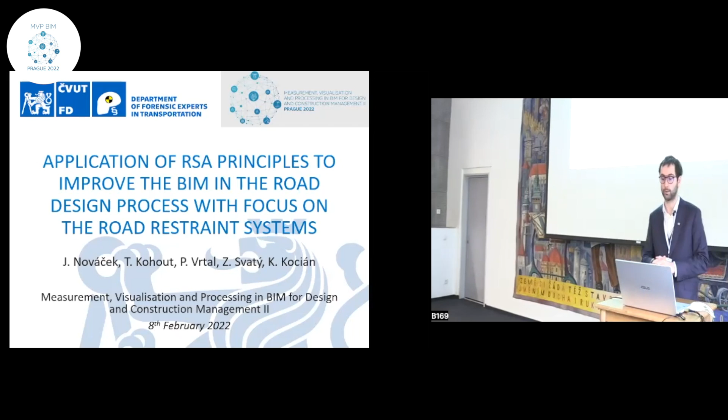Yes, I think it will be slightly different than what we heard before, but I think it's not that far apart. I'm really glad that our last presentation in the previous session was about the railroad system and BIM in that part. What we want to focus on is the implementation of BIM and its usage for road infrastructure. I guess all of you know this, but I've got this slide just to determine where we are focusing and which parts of BIM we are looking for.

For us, the big step up with implementation of BIM methodologies is with aggregation and putting all the necessary information together. So from that standpoint, what we are looking for is all the information which are necessary and important for all the participants, all the involved parties, and also about the processes, what needs to be done during not only the design, but also the construction and maintenance phases of the life cycle of the building. And therefore, those are highlighted.

For the road infrastructure or road designs, we don't have that much issue with the visualizations, or we didn't have before—we are quite far with that. So that part of BIM is not a great advantage for us. But the big step up is with the aggregation of semantic information, of additional things which are in one common space, which can be shared and elaborated on, and especially the sharing of information with all the involved parties.

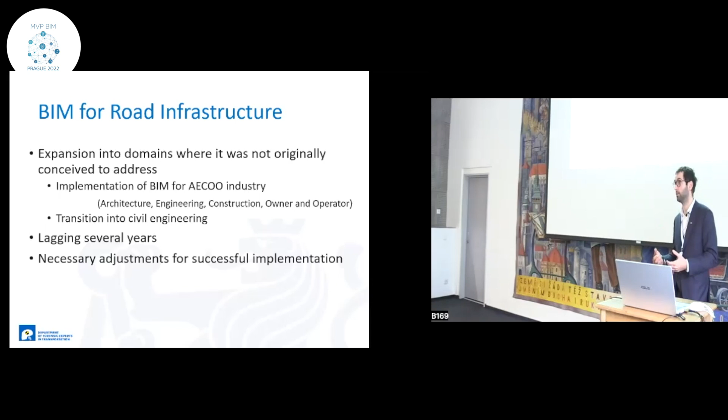Unfortunately, as was already mentioned today and even yesterday, it's lagging behind the actual common BIM which is used normally for buildings. With infrastructure, we are struggling with the IFC, with the formats, with the definitions, and it's a little bit problematic, especially here in Czech Republic, because now most of the big development projects and big infrastructure which are nowadays being planned and constructed are mandatory to be in the BIM format, or at least partially apply this methodology. And that's an issue.

One thing is that there's a slight difference when you want to apply BIM principles from actual buildings to infrastructure. We've got differences—the road is much broader, it's not focused on one phase with multi-level layering. We've got it on a large scale, so GIS is important to also be incorporated in a proper way. Quite a lot of things differ from the actual building.

So it's still not clear what data should be collected, who's responsible for it, and how it's utilized within the process, the whole life cycle of the building or project. And there's quite a lot of things which are interconnected throughout the life cycle, and those are problematic when we don't have the proper terminology, the corresponding standardization—we're missing the crucial steps, the basic blocks on which we can work afterwards. And from the perspective of road infrastructure, safety is one of the main things which has got to be considered.

It's incorporated in the whole road life cycle from the very beginning, when we've got road safety audits, when we are checking whether the road is properly designed. The thing here is that we've got to consider also the drivers, how the road is perceived, whether everything is clear. We've got to evaluate potential hazards which can be created throughout the design.

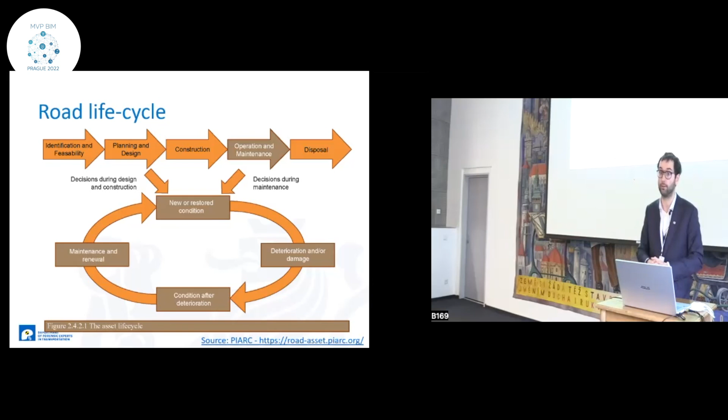With road safety, I won't bother you with that because for you it's quite a borderline topic—for me, of course, it's not. One of the funny things is that the WHO recognized it as a major global epidemic, because quite a lot of people are dying on the roads, and therefore we've got policies, and in general all countries or states are trying to improve road safety.

As I was saying, quite a lot of information parameters got to be considered - not just the operational ones or the spatial characteristics of the road, but also the psychology of the drivers, the traffic volumes, how much cars are going there, and whether it's in correlation with how the road was designed, or if we've got some increase due to a new factory or new spot which is the source of new traffic.

Also, when you are evaluating, you cannot just look at it like a simple building. You've got interconnection with other parts. So when you evaluate, for example, an intersection, you've got to take into consideration what's before or some adjacent parts of the road, if it's all in relation.

There are quite a lot of approaches to that - the RSA, road safety audit, or a road safety inspection, which is on an already built road when we are trying to identify problems and design countermeasures and remedy those issues. Sometimes the remedies deal with the problems we identified but create a new one, so we've got to make some kind of assessment.

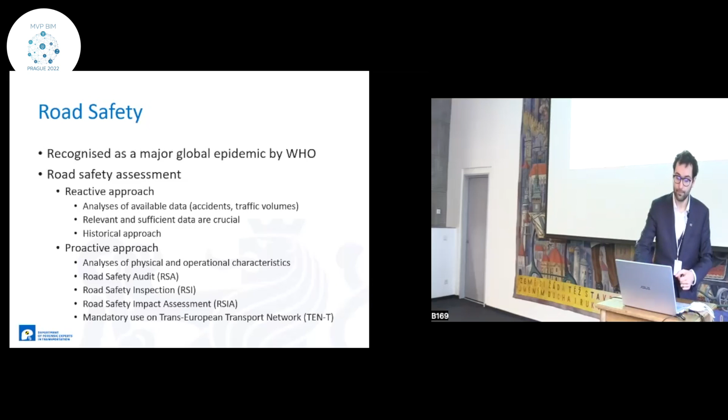And that's an issue. When we looked into it, we said, all right, that's quite a broad topic we've got to deal with, so let's try to find or try the approach on one of the aspects.

On every road, in every state, we've got road restraint systems - guardrails, things which protect you from fixed obstacles. So it's quite specific for our case, and we can go into greater detail with that, focusing on all the aspects which got to be taken into consideration.

Maybe we can use them and try to design the parameters in a way that it can afterwards be easily incorporated in the BIM - what kind of parameters and aspects have to be considered when we want to use that.

When we look into the detail, there's supposed to be IFC 4.3, which should deal with road infrastructure and all the objects and aspects related to that. The issue is that the level of detail depends on the software you are using and on the libraries.

Usually the visualization is kind of basic and doesn't allow further analysis which is necessary, for example, for the audit, for the evaluation of obstructed view of the driver or something like that, interconnections between various types of guardrails, and some basic functional characteristics are also omitted.

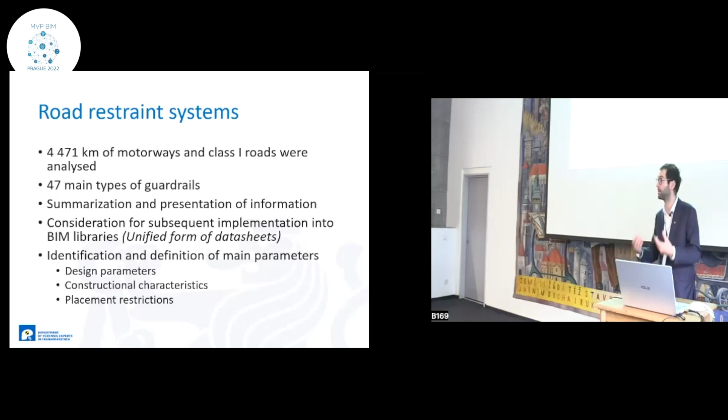For that, we have created so-called data sheets for every guardrail. We identified the main parameters that should be incorporated, tried to define those, and made it available for further implementation. Here's just a small example - basically, you've got some photographic documentation of the general guardrail for this one specific type. As I was saying, we've got 47.

You've got the plans, how they are supposed to be designed, what are the main characteristics, which are rather easy and can be easily implemented. But also there are some other parameters which are quite important. One of them is, for example, the level of restraint - what force or what weight, what type of vehicle we are able to stop. Is it just a concrete guardrail, or steel, or just a wire? So there are specific types and levels of restraint required for different situations. And for that, we've got to incorporate it into our data sheets and prepare it afterwards.

There's an issue that you cannot just place the guardrail and expect it to work. You've got to have some distance from the obstacle you want to protect it from. Otherwise, when the vehicle's going to collide with it, it's still going to collide with the obstacle as well, and the consequences are going to be severe - there's a minimal length. So some kind of conditions for applying the guardrail, so the designer already has the first flag checked and it's prepared for him that it's going to be suitable.

Because the thing is, if you miss some of those in the very beginning with the design phase, the further you discover that there's an issue, the more expensive it is. So if you prepare the parameters and specifications in a sufficient way, but not overly complex, it can make it easier, cheaper, and more effective in the application.

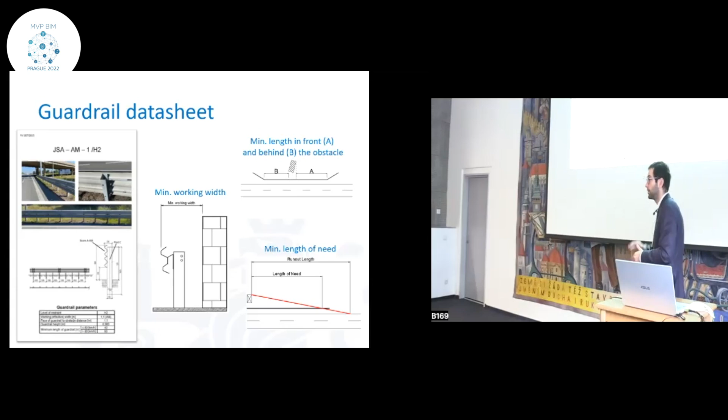So these kind of parameters we have tried to put into that. And the main outcome, where we are nowadays, is that we have defined those 47 guardrails.

We also want to extend, make it more extensive. We are working on more types to cover the whole country. But the thing is that the outcomes can be quite easily generalized - there's not much science into that. There's quite common shared types between the guardrails, or also in different aspects of the safety systems or equipment. So you can take these principles and apply them to a wide range of other aspects. So we are trying to work towards that.

We already know that we're taking into consideration various levels of detail, because sometimes you don't need all of those at the very beginning, but it should be implemented afterwards. So that can be specified by the manufacturer, as we are used to with the classical BIM. There's no big problem.

But the thing is that we are trying to encompass and take into consideration that safety is also an aspect which has to be there, and it's more severe because it significantly affects how the road is afterwards changed and what's the development throughout its life cycle.

Also, if we implement the accurate model for that, we can use it for example for inspections or verifications, where they are not obstructing the view of the driver, or other aspects which have to be considered. And the parameterization enables us to, for example, make the connections with other parts of the road.

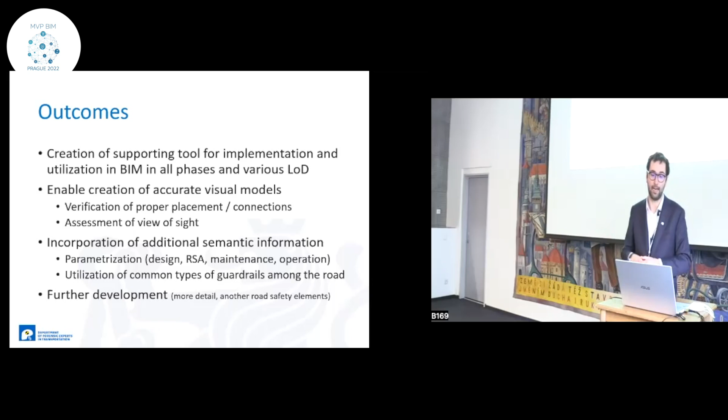So we know which kind of guardrails are used in that region, or from the maintenance point of view, we are suggesting which should be implemented on that particular road to make it easier for maintenance and eventually cheaper. So we are trying to elaborate it a little bit, trying to apply it to other aspects as well, and try to show that these kinds of aspects should also be considered.

So in conclusion, I think transportation infrastructure is one of the critical parts, and yes, implementing BIM is, I guess, necessary. It can save costs, save manpower, make everything more accessible. But if you want to apply it from the building, you've got to make the transition in a correct way. You've got to consider all the aspects which are unique for all the alternations. Therefore, we try to show the way how it's supposed to be done and what should be considered, on a simple example of the guardrails. And thank you for your attention.

Thank you. Does anyone have any question, please? I was expecting that.

I'm wondering how you are delivering the data sheets. You showed us on the slides a PDF. Yeah, but it's a database. So what kind of database? It's in the form of a database.

So far we haven't decided in what form it's going to be handed out, because it was from the academic point of view - that was the goal we are trying to get to. But this research was done in cooperation with the Czech road administrator for the evaluation of road safety inspections, to make it more unified, so all the involved parties know about all the information which are supposed to be there.

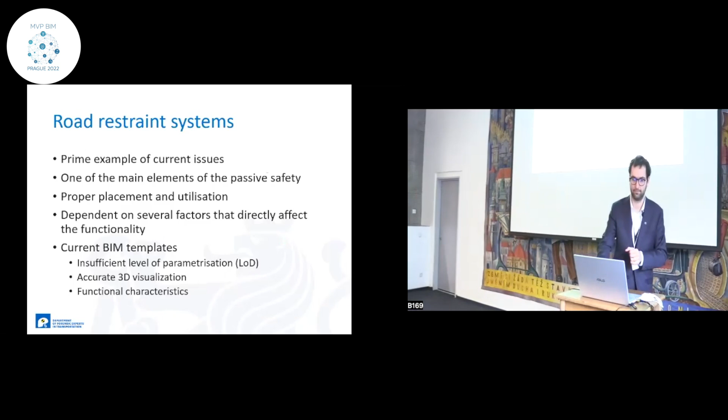More questions, remarks? I have one. Okay, probably it's a silly question, but anyway, don't get me wrong. You showed the road life cycle diagram. Yeah. Probably I've just missed out something. Is there any difference between road life cycle and the classical scheme for building life cycle?

In principle, in theory, not that much. But in fact, if you build a building, you are usually changing the internal layout based on what the room is used for. For example, this is a presentation room, and maybe they will decide it's going to be a cafeteria. So there's going to be a slight change, but most of the structural parts are going to stay the same. With the road, you've got two things which quite a lot affect how the road's going to look.

One of them is the safety audit, because there's quite a lot of accidents due to left turns or improper design or some design flaw, or not design flaw, but some other aspects which couldn't be covered in the very beginning. And then you change the whole layout. And usually if you've got the BIM, you don't have just one intersection, you've got a stretch of road over 100 kilometers.

So the integral structural parts are changing quite a lot, and therefore the maintenance phase is slightly different, because you've got larger changes there. And therefore these kinds of parameters should be there, because the safety is straightforwardly changing the layout. Thank you.

I realize I hope that answered the question. If not, I realize there's already discussion, but how do you think, the last one - could we consider geospatial monitoring as a part of safety?

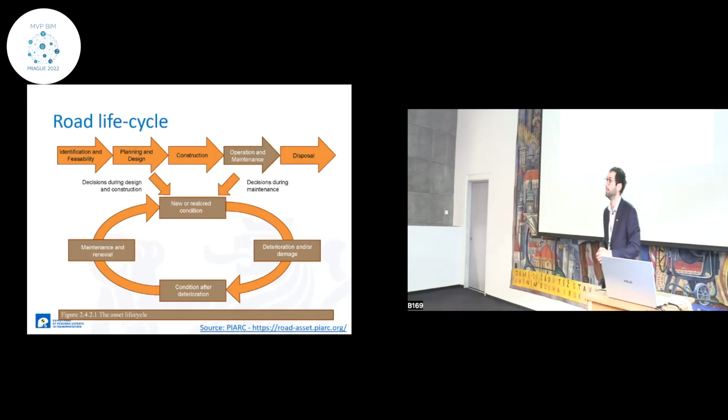Well, the second presentation is just what I mentioned in my introduction. This presentation is about historical BIM, and what's more important, it's the first time today that I see the question of digital twins. So I would like to give the floor to Angelo Massafra, and his presentation is towards digital twin-driven cultural heritage management, HBIM-based workflow for energy improvement of modern buildings.

Pleasure for me to be here with you today. Today I'm going to present a piece of my PhD research that I'm carrying out at the Department of Architecture of the University of Bologna. In particular, I present a specific topic of this research, and I want to focus your attention on a workflow based on BIM and also BEM models, building energy models, that we set up for studying the energy behavior of modern buildings. And I will explain what modern buildings are in our assumptions.

And to study also some intervention strategies for the energy improvement of these buildings that could be driven by data, so that could support building administrators and asset managers, for example, in decision making when they have to do some interventions.

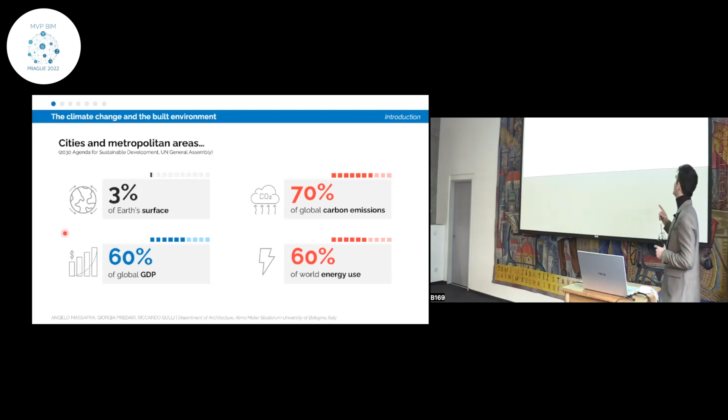But I want to start with an introduction, presenting some data about the impact of the built environment and cities on climate change. We know that cities, and more in general the built environment and urban areas, occupy only 3% of Earth's surface. However, they contribute to about 60% of global GDP, 70% of global carbon emissions, and 60% of world energy use.

So it is a critical issue, and I think everyone in this room agrees with this statement. So what's the starting point for us engineers, architects, but also public administration - I will focus on public buildings and asset managers - what do we have to do to solve these issues?

I think we can start by thinking about the built assets, the existing buildings, because a lot of existing buildings in Europe have low performance in terms of energy behavior, but there are also other problems such as structural safety. Today I will focus only on the energy behavior.

This is a critical point if we speak about historical buildings, because all historical buildings in Europe need to become more energy efficient. But especially in Italy, where I'm from, the question is tricky, because we cannot intervene on these buildings with usual construction solutions - we have to protect them, respecting their cultural, architectonic and historical values.

So we have to find new strategies, and I think we need to implement a system based on data that could build consciousness, knowledge and awareness about these buildings. We are moving on these topics, and in this huge framework we are focusing on particular construction techniques - modern buildings.

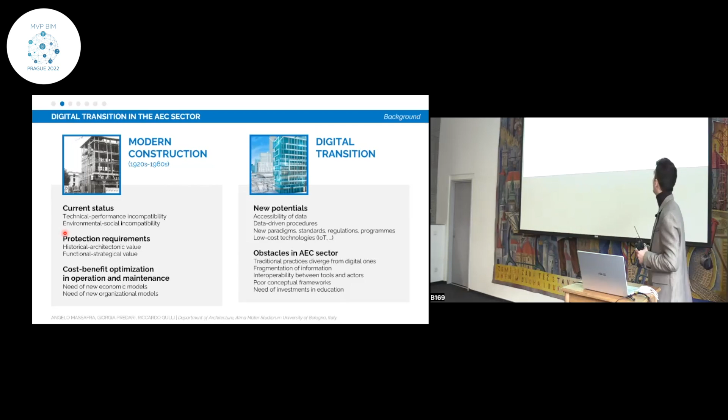So there's increasing accessibility of data, new data-driven procedures, new paradigms like digital twins, BIM and artificial intelligence, and low-cost technologies such as IoT sensors. But we know there are a lot of barriers and obstacles in this sector that we have to face - it's a quite complex problem.

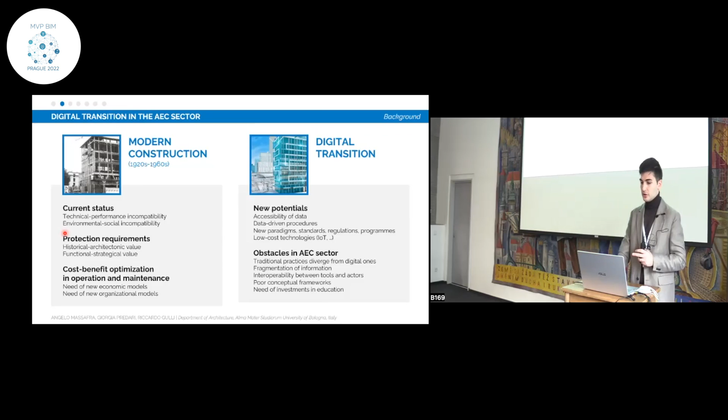But I want to share with you the general framework of the research. Here you can see this synoptic image of the research. On one hand we have the physical twin, which refers to the actual status of the building - its history, but also its actual and current status, its state of conservation, for example.

And on the other hand we have our digital twin. There are a lot of definitions nowadays of digital twins. I think we can speak about a digital twin as a virtual environment that could support us with data in the main phases of the life cycle of buildings.

So for implementing the documentation, that is a crucial topic for the existing buildings and above all for cultural heritage, but also for implementing the conservation, the restoration or renovation, and the management of this building.

Now I will show you in a very brief way our case study. Our case study is the building stock of the Alma Mater Studiorum, that is the University of Bologna in Italy. It is a very significant case study, both at the building and city scale, because it has lots of buildings with a high architectural value.

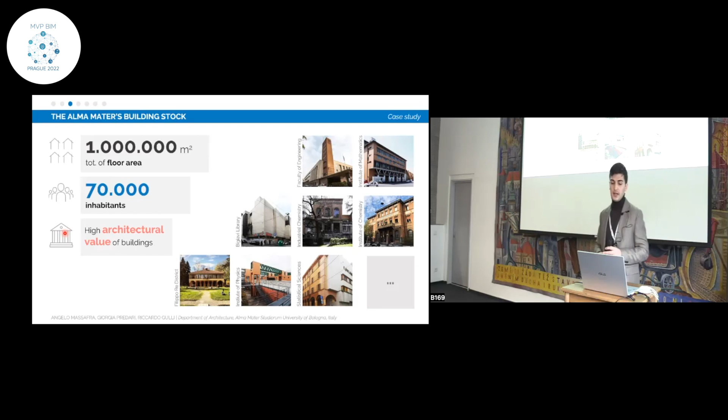You can see here some modern buildings of the university, but we also have medieval buildings, not only modern ones. It is very huge, with about 1 million square meters of floor area and lots of users and inhabitants.

This is the specific building on which we applied the protocol, the investigation method that I am going to present. That is the Institute of Mathematics of Bologna. It was built by the Italian architect Gio Ponti about in the 30s, in the old town of Bologna, where the university area is located.

As you can see, there are a lot of functions related to university life that the building hosts, such as offices, classrooms, laboratories, libraries, and so on. The most important thing in this slide is that this building has a high U value, so low performance, both of opaque and glazed envelopes. Above all, this red data shows that the building requires a lot of energy for heating during winter, so it is classified in the lower energy class dictated by Italian regulations.

Here you can see the method that we set up to investigate the energy behavior of this building and support the conservation or renovation strategies in terms of energy improvement. Today I will present the first 3 steps of this research, since the last one, the operational one, is the more complex one and is currently under development. As you can see, there are 4 different steps: the documental phase, the computational phase, the predictive phase, and the operational phase.

Starting with the documental phase, which is quite important for cultural heritage, we defined this workflow that could be applied also on similar buildings, starting with archival research about the building to know, for example, the construction site documents, the history of the building, but also the stratigraphies of the envelopes, and so hypothesize some thermal properties of the building, as well as windows, window frames, window glasses, and so on.

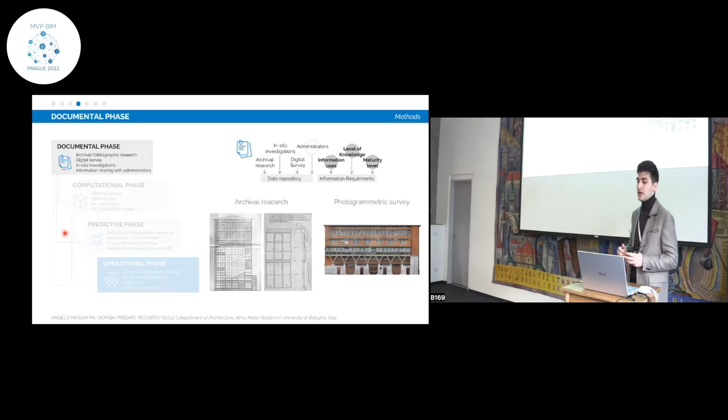So we performed this research, continued with in-situ investigation, and then started to produce this model that you can see in this video, starting to analyze the building energy model simulation, to know the actual behavior in terms of energy performance of the building.

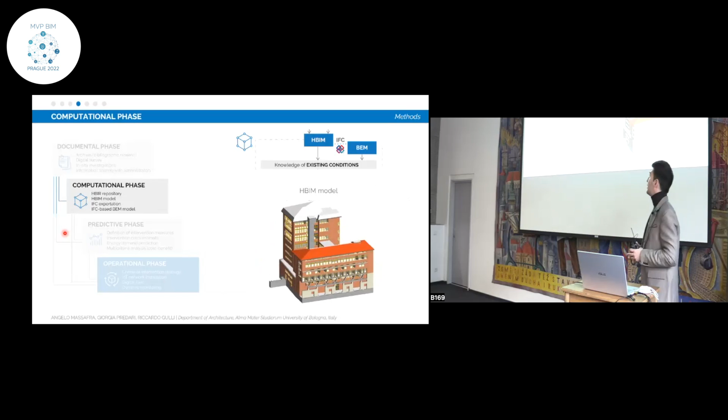So we tried this workflow to test the interoperability between BIM software and BIM tools and data, more generally with BEM software, that is building energy modeling.

I'm honest, we had some issues and had to manually solve some problems. For example, you can see this roof on the main facade - it is flat in the BEM model because there are a lot of uncertainties related to the geometries. We also had to manually copy some data from the BIM model to the energy model, such as the climate data and the geographical data of the site.

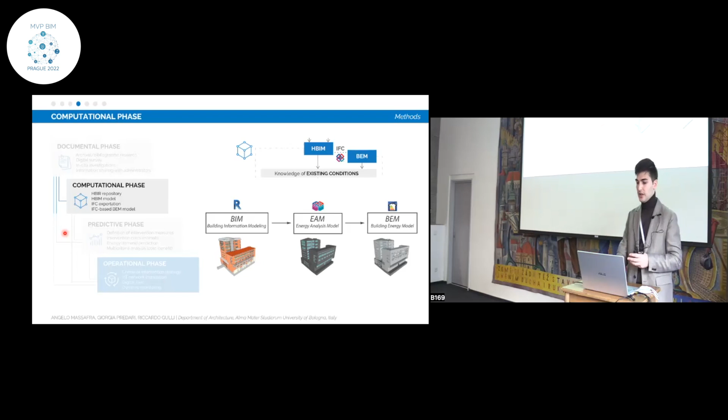However, it was quite good to perform a pre-simulation of the current status of the building. Here, there is the last phase, which I will present in the results at the end of this presentation.

We defined 5 intervention measures: roof insulating, facade insulating with 2 different materials (B1 and B2), and window substitution or integration. We combined these into about 12 intervention combinations, and calculated the investment costs required by the interventions through the BIM model. We also calculated the energy demand of the building, focusing on winter heating, starting from the BEM model produced through IFC format.

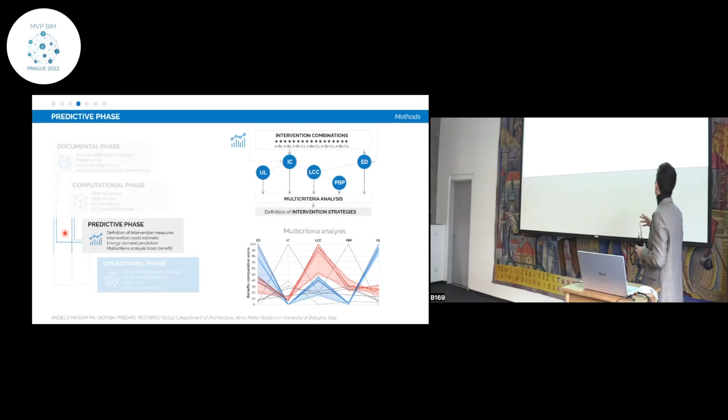And then this is the final result, which I will show you in more detail. It's a multi-criteria analysis that we set up to compare these different intervention combinations from an energy point of view, but also from a cost and financial point of view, which could be very important for the building administrator. So let me show the results of this analysis.

You can see the graph with the results on the right, and on the left the whole method. Let's start here, just summing up what I said before: 5 intervention measures, which we combined into intervention combinations, and then we started to study 5 different parameters. We have investment costs from the BIM model, energy demand from the BEM model, and starting from these two main parameters, we also performed the life cycle cost analysis.

So we analyzed the energy savings that interventions could bring to the building over the next 30 years. We also studied two more parameters that, to be honest, revealed less important than the first three: the payback period, related to financial issues of the interventions, and the upgrade level of the building. Finally, we performed this multi-criteria analysis, shown in this line graph.

To compare different units, like kilowatt hours or euros, we decided to scale all the values of this analysis into scores from 0 to 100. So if you refer to a specific parameter, like energy demand, and choose an intervention combination, you can see if the value is 0, it is maybe the worst intervention in terms of energy improvement of the building.

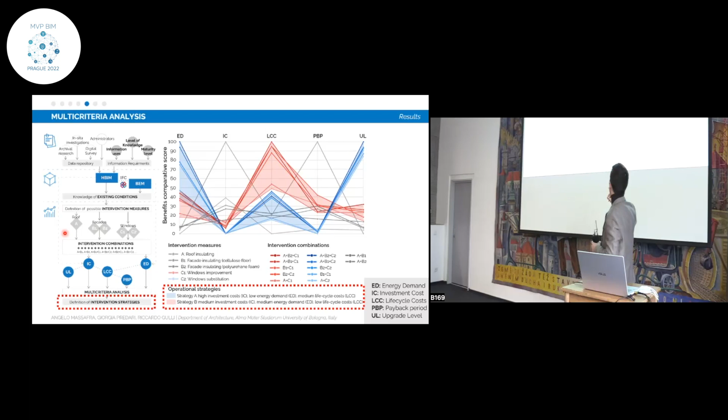This analysis allowed us to define 2 different strategies, shown with these 2 colors: strategy A, a group of intervention combinations with high investment costs, low energy demand, and medium life cycle cost; and strategy B, related to medium investment costs, medium energy demand, and low life cycle cost. We compared these two solutions with the current status of the building, shown in black.

You can see the energy demand is quite lower for the intervention solutions, but there is a significant gap to consider regarding energy gaps in building simulation. So please read this data as comparative and qualitative. But we know that intervention solutions are quite good for our case study.

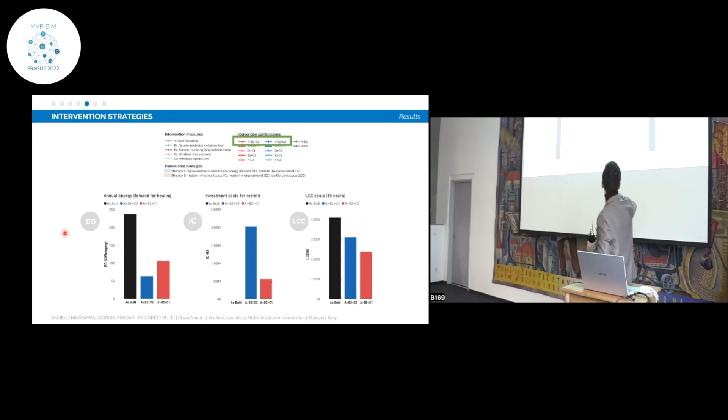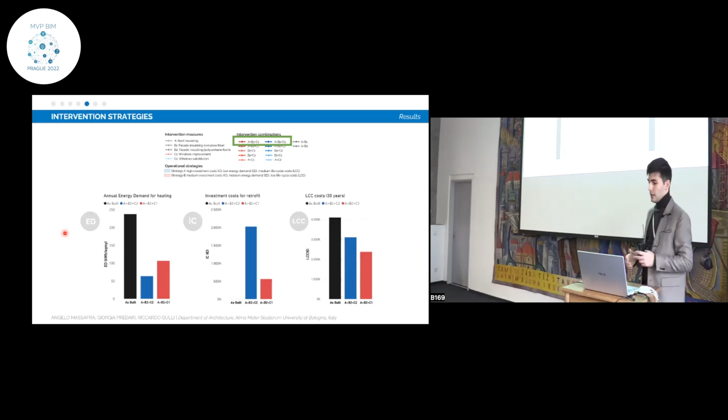Here we can see investment costs that are 0 for the current status of the building, but very high for the blue value, and quite low for the second value. Finally, the life cycle cost over the next 30 years is the most significant result, because we can see that by intervening on these buildings, we could achieve not only energy improvement, but also help public asset owners save costs and public money, for example.

I'll be rapid about this point. Here are the future developments of our research. We want to implement digital twins for these buildings, adding dynamic data to this static data, which could be acquired through IoT sensors, for example. We're planning to implement these digital twins for 3 reasons: energy model calibration, energy saving through monitoring of dynamic data, and more generally, performance-based management of this heritage.

And this is my last slide, showing some dashboards I'm developing in a common data environment that relates to the BIM models, and that could display not only 3D models to the asset owners, helping them become more aware of their real estate.

So, going to conclusion, I want to sum up. We set up this method that could be applied on new modern buildings of Bologna, on new case studies, better. But we also tested the interoperability between BIM and BEM softwares to open formats. That is still in its initial stage, also for our results.

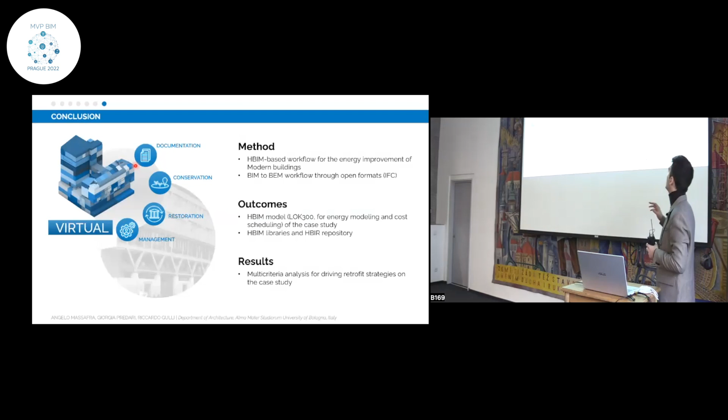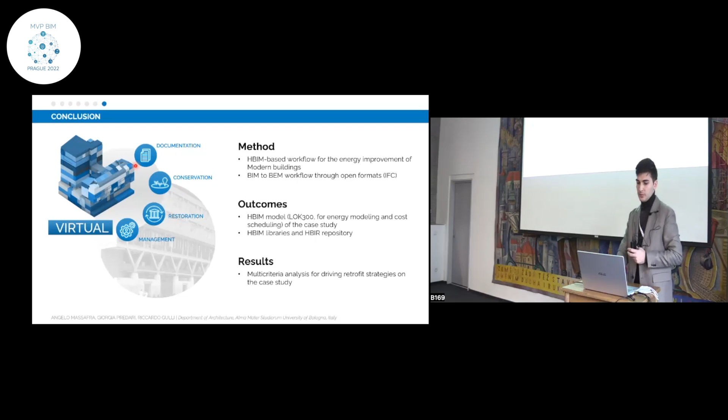We also produced some important outcomes: the BIM models of the building that could be used in future digital twins, and this multi-criteria analysis, a comparative analysis that could help asset managers in decision making. So I have ended with my presentation. I'm sorry for being late, I took about 2 minutes more, but if you have any questions, I'm here, or you can write me by email.

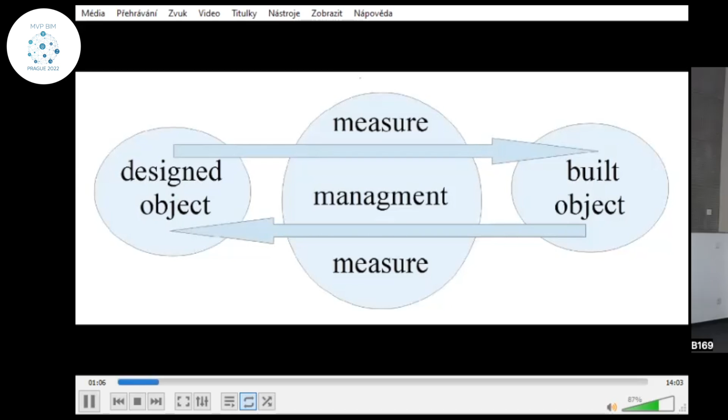There is only one modus operandi to implement this BIM temporal iteration: measuring the built to return from the real to the virtual. The BIM model is modeled on reality. According to computer graphics development, the reality returns to the model by measurements, also in an automatic manner. Through measurement, from the construction site built object, you return to the model designed object, in an active way.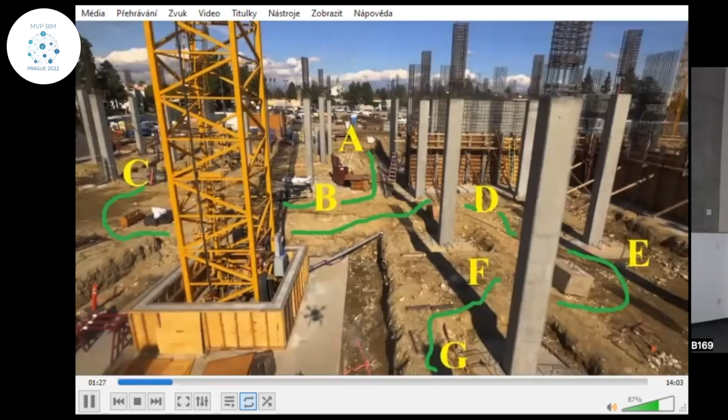It is not only a control action. If the object is built in discrepancy with respect to the design, the BIM model must be modified or built again. Especially if the object was made directly at the building site, it can be measured and checked easily. There isn't a need to automatically obtain the ontologies of the objects measured or scanned, necessary and expected, for example, in research areas such as HBIM.

Case study: a public work, the Military Academy Italian Navy Headquarters Livorno. The first case study is the expansion and recovery of the headquarters of the Military Academy Italian Navy. It is an important project, more than 50 million euros, requested by the Navy and entrusted to the Ministry of Transport and Infrastructures, through the Provveditorato of Public Works of Tuscany, Marche and Umbria.

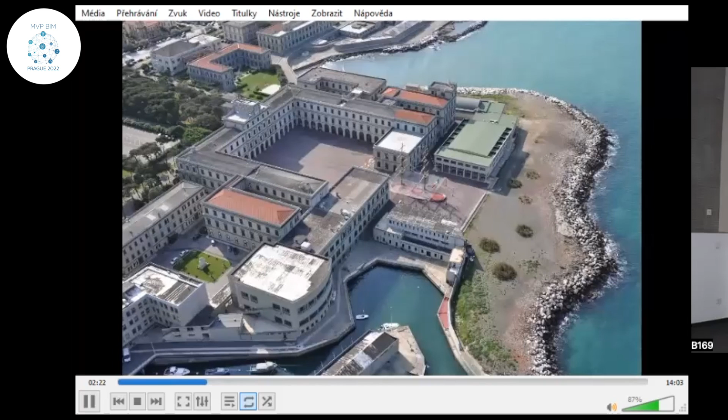For both institutions, this is one of the first cases of use of BIM, and they have requested the support of the University of Pisa. There has been a collaboration for years between the Provveditorato and the Master in Building Information Modeling of the University of Pisa, which has also organized BIM courses for ministry employees.

Our BIM research group is required to give support to clarify everyone's tasks and mediate the needs of professionals with the needs of the works management. The support was asked of us regarding both design and construction.

It is necessary to measure the coherence level between the most important interests of the partners. For the public, it is the information specifications. For the designers, it is the project presented. For the construction companies and suppliers, it is the management of their commitment. Based on our experience, measuring this level during the progress of the work, step by step, becomes essential.

The whole situation is more complex because in the project there are two parts: some new buildings construction, and the recovery of the main old building, Palazzo Allievi. In addition, during the entire construction time, no academia activity can be suspended.

Methodology: to meet the needs highlighted, it was decided to set up a BIM team, bringing together the different BIM skills of the professionals of the three public partners. The BIM team is a control room of the whole procedure, which must continuously support the procedure head. During the project, the team will interact with all the private partners about every BIM aspect.

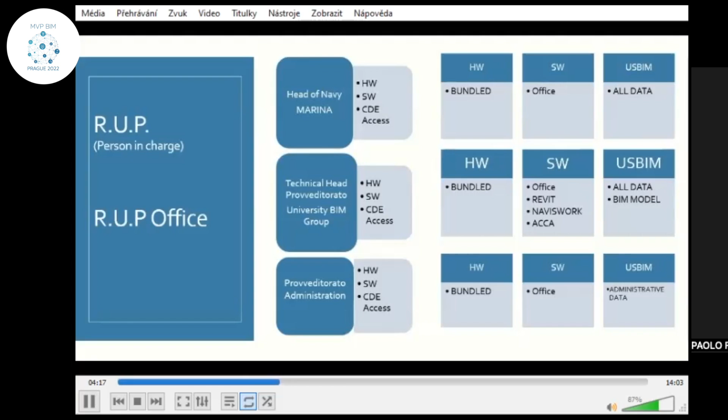The second step was to clarify a workflow for the professionals of the public partners, according to the needs of their internal procedures, the different tech competencies, and the BIM software knowledge. We have suggested our vision and decided a customized management plan. We have considered the normal practice about the use of BIM for public works in Italy. We have identified some critical aspects in this practice and proposed some solutions based on the concept of measurement as a verification of the BIM procedure and model.

The procedure we have proposed can be schematized with the following sequence: 1. BIM executive model delivery, verified by the designers. 2. Model checking by the procedure head of the public partner. 3. Model approval by both procedure head and control authority. 4. Model validation: each BIM model element is linked to the acceptance checks, the measure of the built object, the technical data sheets, the reference drawings, the materials brought by the companies, which must correspond to the CI requirements, and every change introduced by the designers.

5. The BIM model becomes official, uploaded in a virtual environment editable only by the public partners. 6. Starting of the construction site. 7. BIM model requested for any technical component changes proposed by the private partners to the construction management.

8. Under BIM team control, the accepted proposals are uploaded by the private partners' professionals in the BIM model, which becomes the as-built version. 9. The procedure from point 7 is iterative. According to our procedure proposal, the BIM as-built model grows up step by step simultaneously with the construction, and everything remains under the control of the construction management.

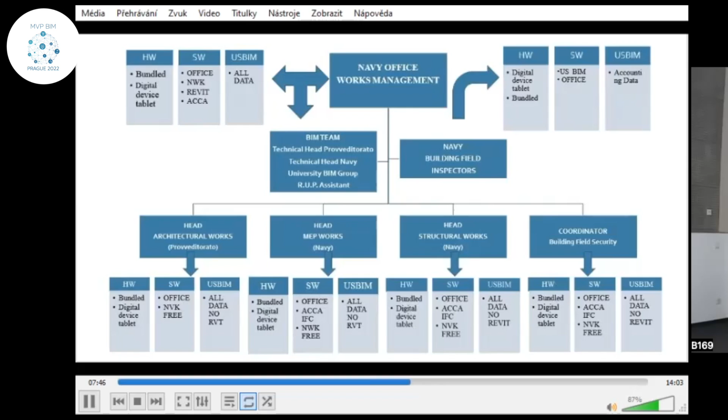How much BIM? The concept of measurement can be a way of implementing BIM, because it means not only exchanging data between design and construction, but also identifying the accuracy, the reliability, the quantity, the margin, the level of BIM, the modus operandi.

The case study proves how BIM management starts with the ability to identify how much BIM is needed for a specific work. This ability is not an option, but an integral part of the BIM management process during the entire work construction. Identifying this level is the way of BIM.

In BIM dimension, the link between design and construction is not only linear, but cyclical, and it includes the concept of verification by measure. To sum up, the BIM process and model together is not a standardized or homologated method.

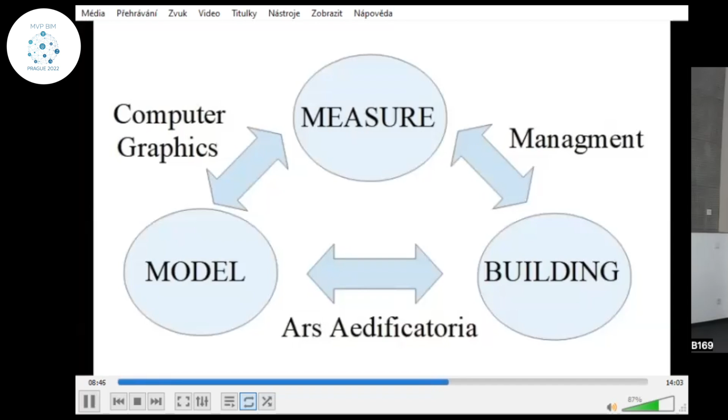Case study: a private work. In the second case study, an important private company asked our BIM research group to design a system to support the laying in the building site of their products, independently of the construction company, and worldwide. We can document how, in the application of the BIM method, there is no cognitive or practical problem of passage of scale from photogrammetry to remote sensing.

The theoretical and practical heart remains the identification of the level of BIM ontology. It is always necessary to be able to find tailor-made BIM strategies and solutions to approach any situation, and to manage it day by day, in the office, in the construction site, remotely or physically.

The project proposal: the web app must have two levels, which we diversified into the manager user (UM) and the operator user (UO). To respond to these requests, we created a BIM GIS system. The main elements are a web app and a coding reported on the construction elements during their fabrication.

Usage pattern: the usage pattern is designed for two different users. One is in the building site, the user operator. The other works remotely in his office, the user manager.

The user operator, with his smart device, accesses the web app, scans the QR code of the construction component on the building site, collects data, adds the geolocation, time and date, and sends the acquired data to the reserved virtual area of his user manager.

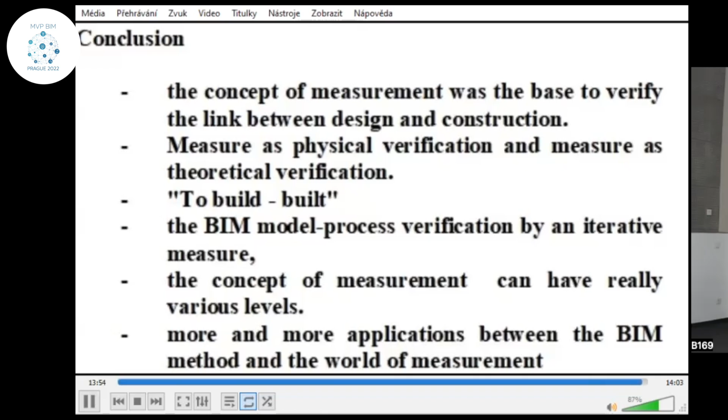Well, that's it, I guess, yeah? So, any questions? Please. Does anyone have questions or remarks or suggestions? So, then I have one.

Professor Fiamma, how do you think? In conclusions, you mentioned that measurements can have different various levels, yeah? And you mentioned just two, time and dimension - which levels do you think can be also except for time and dimension?

Yes, in this presentation, I speak about only two levels, but in the paper there are more different levels from an ontological point of view, practical point of view. And my opinion is, I speak about our condition, public work condition in Italy.

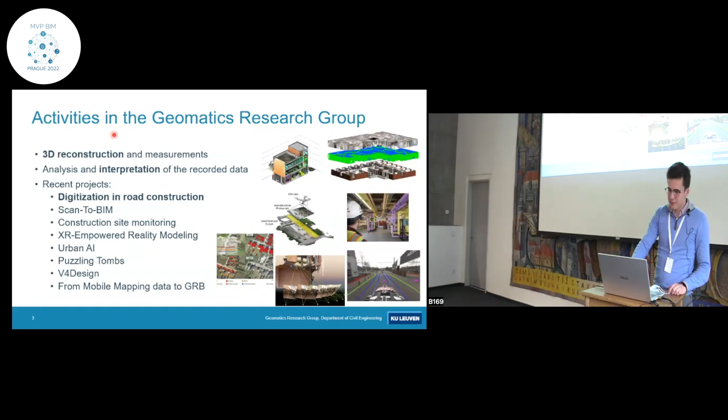Our research group focuses on 3D reconstructions and measurements, and we do some analysis and interpretation of these recorded data. These are some recent projects from us. I'm busy with the digitization in road construction, and my colleague told you about the scan to BIM. The problem in road construction is that it's little digitized, and my project is about automating some things in road construction.

So the first thing is to capture remote sensing data, that's on the left side of this picture. It's about - I use RTK UAV. The next thing is to extract information from these georeferenced outputs, and the last thing is to interlink and exchange with BIM.

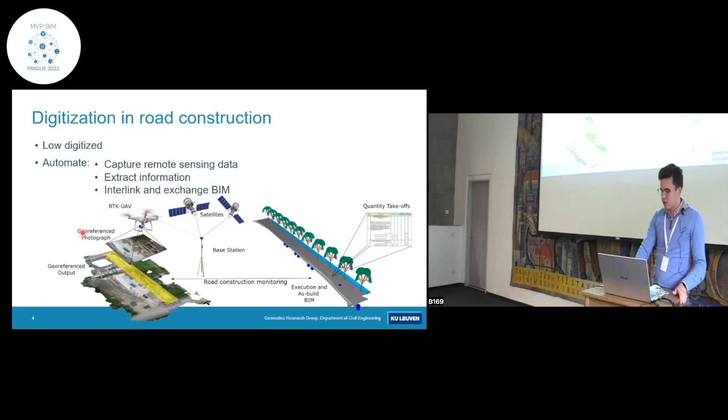So the methodology exists of two major parts. The first part is to ensure homogeneity, to provide the basis for automatization. That's using some specifications provided by the local road agency. The second part is to automate georeferenced outputs from an RTK drone. The purpose is to start from an execution BIM and go to an as-built BIM by using detected objects from these automated different outputs.

In this paper, I'm going to manually detect them, but the purpose in future research is that it will be automated. So the homogeneity of the data is important to provide automation in the future.

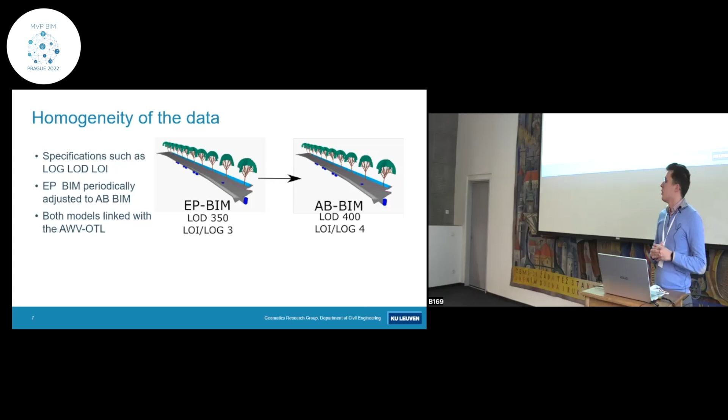There are some specifications like level of geometry, level of development, and level of information that is needed, and it's different in the execution phase BIM and the as-built BIM. Periodically, the execution phase BIM should be adjusted to the as-built BIM by periodically flying with the RTK UAV drone. Both models are linked with the AWV OTL, an object type library of the Flemish road agency.

So these different outputs are currently already automated. I start with the RTK drone - these are uploaded in the Metashape software, and then the problem is that Metashape doesn't support the Belgian coordinate system, so there is an external transformation used to take the coordinates from Belgium. It's with the selection list because there are two different coordinate systems in Belgium, and then some outputs are automated from that, like a digital elevation model, point clouds, meshes, and so on.

Then I did some experiments. The first experiment was to test the accuracy of the RTK drone. First of all, I tested some different markers because they have to be detectable from height in different weather conditions, and they have to be durable throughout a whole project. So with that experiment, I found out that 3D printed targets are the most durable and most detectable targets.

Then I put them in the test site to test the accuracy. So these markers were measured with the drone and also with the GNSS sensor. In the paper you can see the accuracy, and it's quite the same as a GNSS sensor. So you don't have to need ground control points when you're using an RTK drone.

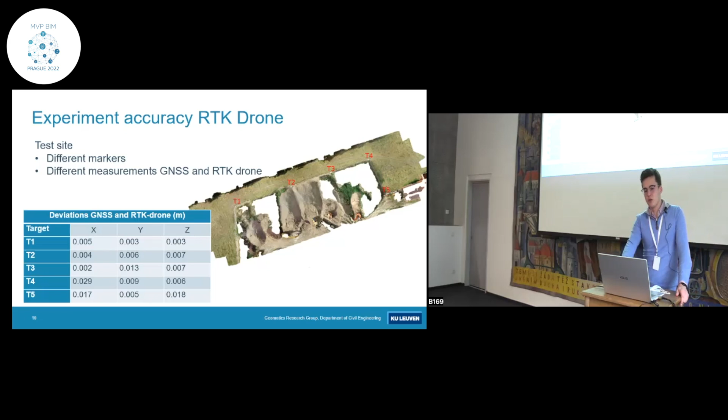Some other experiments, I had a test case. From that, I chose 3 objects to manually detect in order to see if it's possible to, in further stages, automate them. I chose sewers, subfoundation, and manhole covers. These are accuracies that are provided by the Flemish agency.

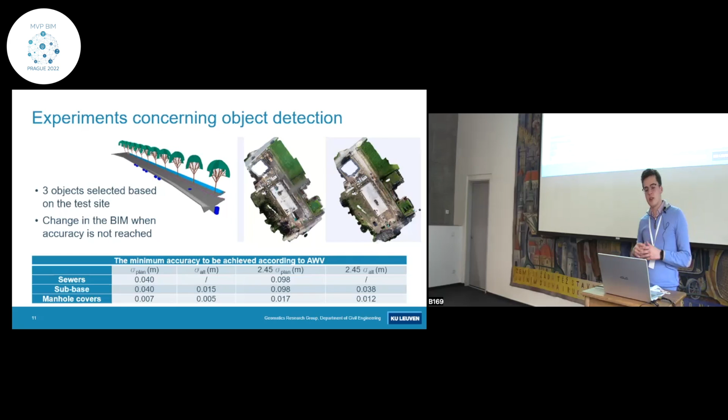Also, when the accuracy isn't reached from these objects, they have to be changed from the execution phase BIM to the as-built BIM.

Another detection was the subfoundation, but the subfoundation wasn't finished yet in this test case. So the hypothesis was to detect them on a mesh. Right now, it's not possible. I don't know if it's not possible because it's not finished, or if it's not possible on the mesh. So that should be future research.

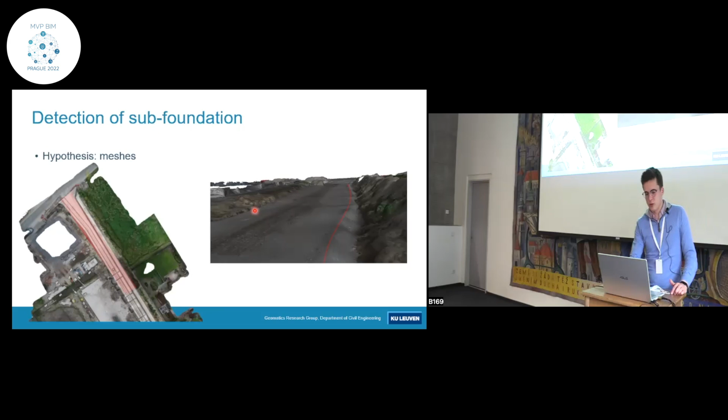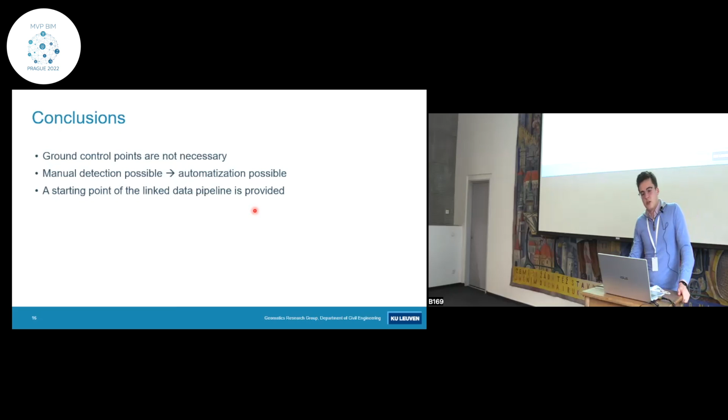And like I said, when an accuracy has not reached the as-built BIM, it should be changed from the execution phase BIM. So the conclusion of this paper is that ground control points are not necessary when you use an RTK UAV drone. I did some manual detections on some objects, so an automation should be possible. And I started a point from the linked data pipeline by the homogeneity of the data that I started doing. So thanks for listening.

Thank you. How does the object type library you talked about really look like? Do you have the objects like Revit families in it, or is it just the semantics, the OTL you talked about? Yes, that's something the Flemish road agency just started doing. It was introduced in 2021, I think, and it's still in the test phase. It's not a Revit family, it's semantics - so no geometry, but very similar to what we have heard from the Czech Republic. Yes, okay, interesting. Thank you.

Any more questions, please? No question. Thank you. No, thank you.

Well, as in the famous song, time to say goodbye. Yeah, well, it's much better to deliver presentations without a microphone in hand.